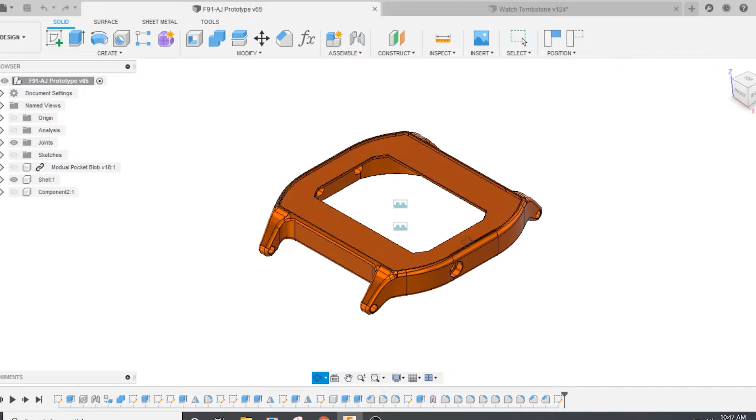This is what we're going to finish making today. I started this process in my last video where I got most of this underside geometry made. Now we're going to finish off the top here. We're going to do that on my custom tombstone. We're going to start by clearing away all of the excess material with an adaptive clearing and a Lakeshore Carbide 3-flute end mill.

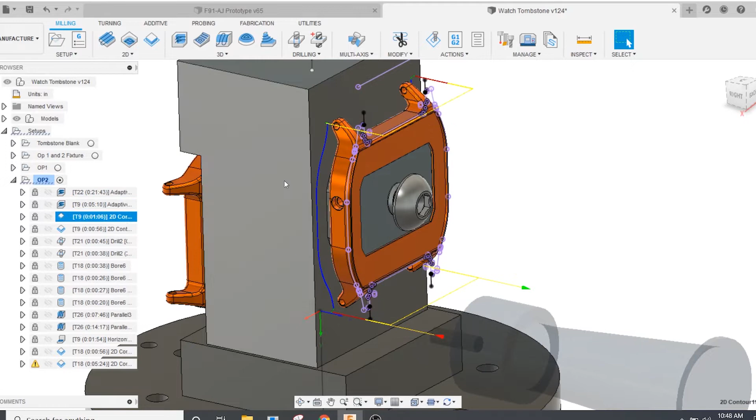3/16 3-flute. Then we're going to move down to a 1/8 inch 3-flute. This one's from OSG. And that's going to peck away all of the material the 3/16 is going to get into. We're going to do finishing passes on the left and the right sides here with that same OSG 3-flute. And then we're going to finish the spots here for the watch band again with the same tool.

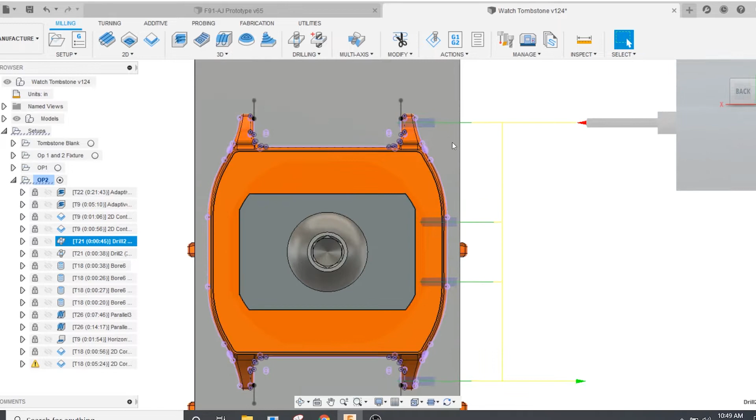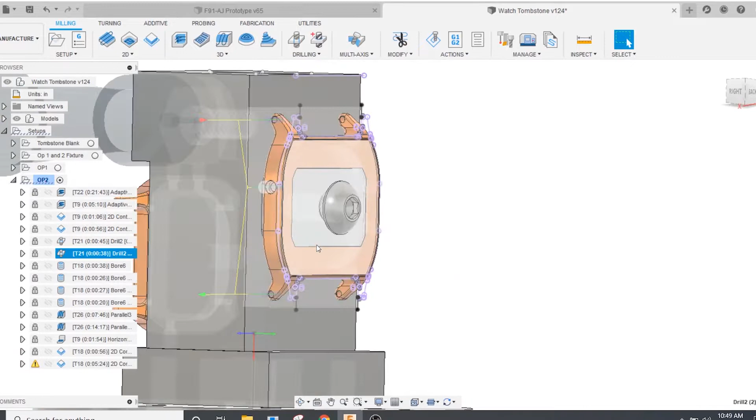Then we're going to go to a drilling operation with a drill that's about 50 thou. It's actually 1.25 millimeters. And it's going to drill the pockets for the spring bar. And it's going to give us a pilot hole on the pockets for the buttons. And then to the other side, again, spring bar holes, button holes.

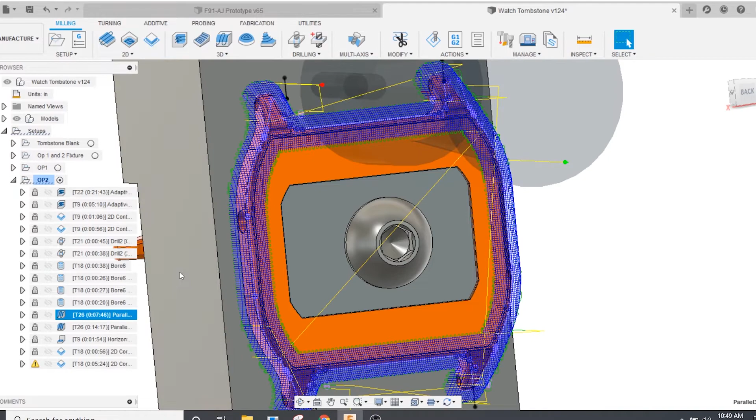And then we're going to go in with a 1/16 end mill and clean up all of the buttonholes. It's stepped here, so it's broken up in two different operations. It'll do the big step first and then the little step all the way around. Then we are going to do a finishing pass on these fillets with a 2-flute 1/8 inch ball mill. This one's from Harvey Tool.

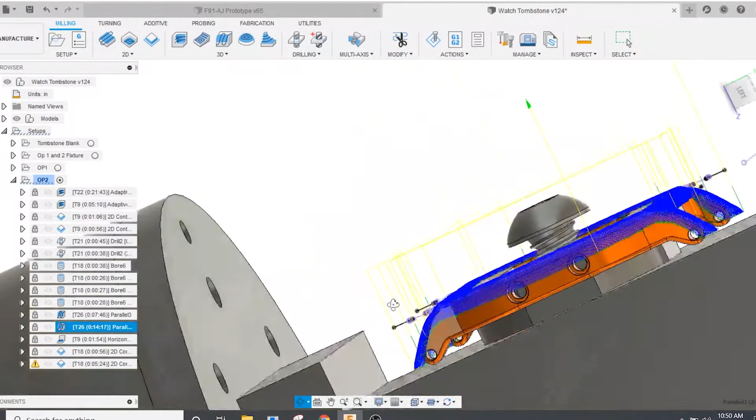Actually, we're going to do a semi-finishing and then a full finishing pass here. I found that got a more consistent finish. And that should get all of the curves all the way around. Then we are going to finish the face here, going back to the OSG 3-flute 1/8 inch end mill.

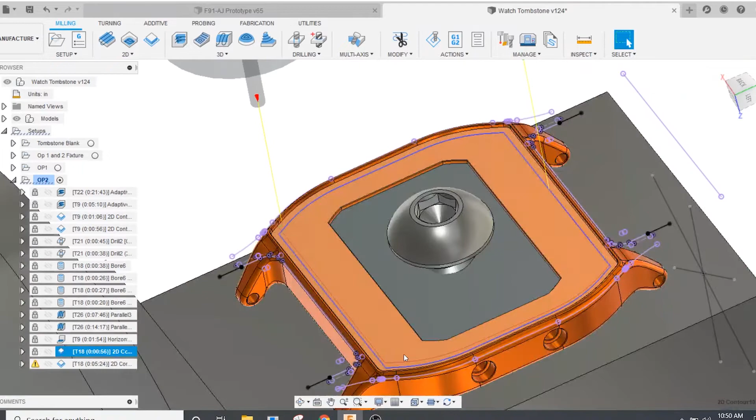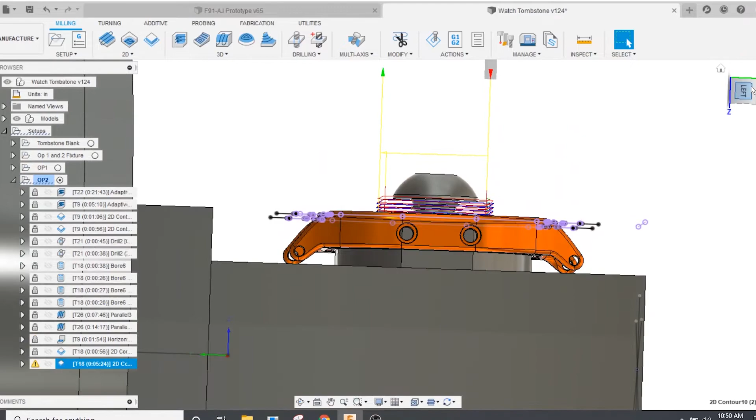And then we are going to do a finishing pass on the inside wall here, all the way around, and then it's going to eat its way through a little hat of material that we're going to have left and cut the watch out from the screw that is holding the whole workpiece in place, and also going to finish that wall. This is what I'm most worried about. I'm probably going to break that end mill. I've just accepted that, but I haven't found a better way of doing that yet.

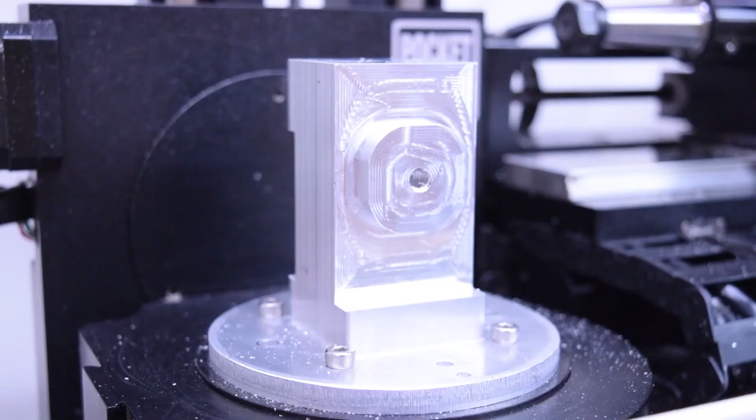This is what the workpiece from last time looks like. I've actually had to make this again. The first time I ran it, the one you saw in the video last time, I didn't have the 1/16 inch tool to do a finishing pass on the inside here. So this was oversized and wouldn't have fit on my custom fixture on the Pocket NC. So the other night, I just ran another one. Now that I have the code proved out, it's actually pretty hands-off and wasn't that difficult to run.

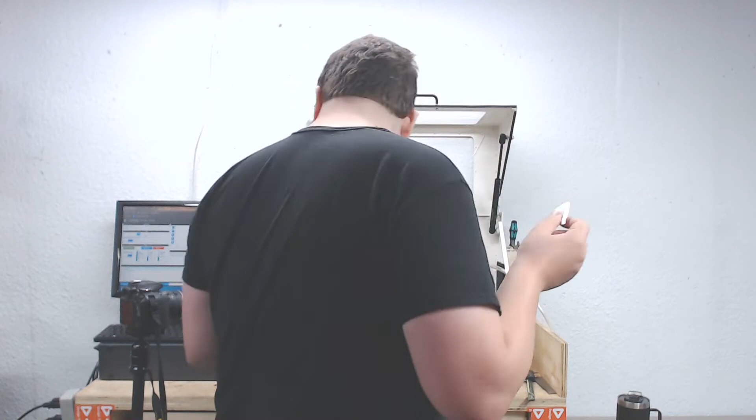And the finishes on this one are better because I got some better tools in from Lakeshore Carbide, and I was able to tweak my code and my speeds and feeds from what I learned last time. I've had a little bit of time to do some experimenting and measuring, and within what I have the ability to measure right now with my calipers, this inside pocket seems to be in spec. The problem is, even with it in spec, it does not fit on my custom fixture here. And that's okay. I intentionally left this a little bit oversized. But we need to fix that before we get started.

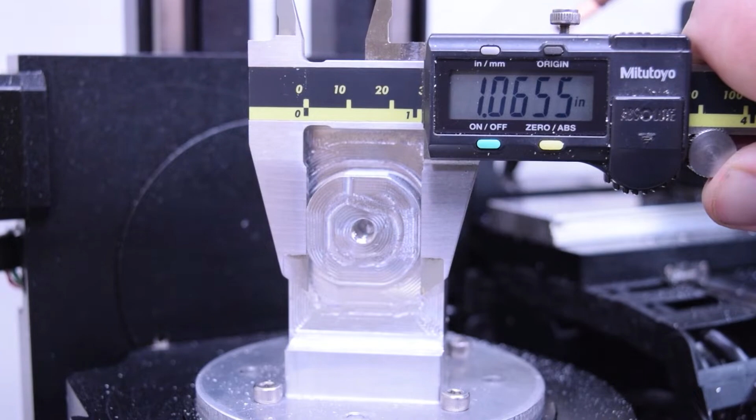So the first thing we need to do is run a couple more light passes on the fixture until it fits this. My fixture here is measuring 6 thou oversized. My actual part here is measuring dead on. So I need to take off at least 6 thou on my fixture to get it to fit here. First thing I'm going to do is put in my 3/16 end mill, and I'm going to run a spring pass of exactly what ran last time on here to see if that changes anything.

All right, everything's ready. This should be a very conservative tool path that takes off almost nothing, or maybe doesn't even touch the part. Okay, that definitely didn't touch the part. I'm going to take off some stock to leave in CAM and rerun it. So I found a mistake. I meant to give it 3 thou stock to leave. I gave it 30 thou stock to leave. So that was never going to touch the part. I'm going to put it back to 3 thou, not 30 thou, and try again.

Okay, that was a good, just very light spring pass. It should still not fit. It's still not fit. So let's walk it in by, I think we can do a thou this time. Still not quite there. I'm just going to keep repeating this until I get a good fit.

So that took a lot of passes, but I'm very happy with the fit. It is basically perfect. It goes on fairly smoothly. It might be a little bit difficult to get off, but I think we can manage that. There is zero wiggle whatsoever. It is beautiful.

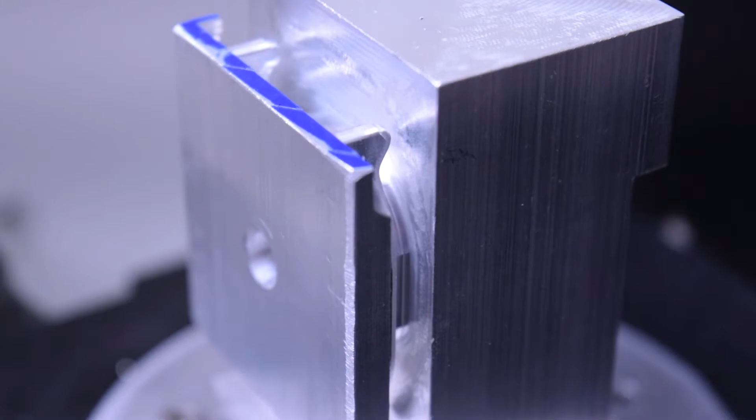All right, time to move on to the actual part. We're going to start with the same tool that I've been using to clear away most of the hat left on this part from the first op and start to rough out, actually do most of the roughing on the top.

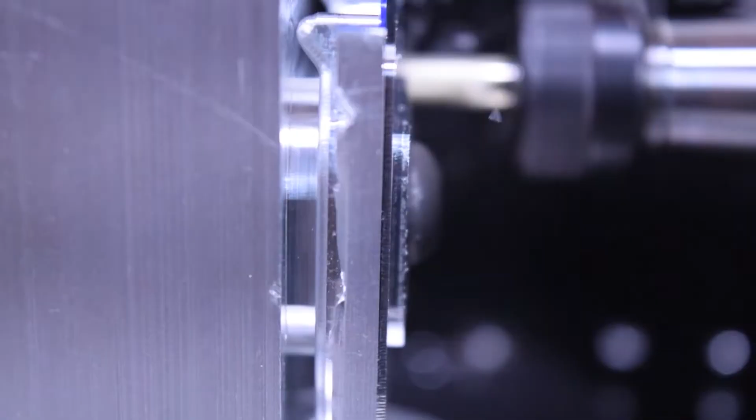This is really starting to look like a watch, and it's awesome. That's the most of the material removed. Next couple ops are basically just removing little bits of material, just chipping away at any extra stock that's left that we couldn't get to with the 3/16 end mill, and we're going to just start stepping down sizes.

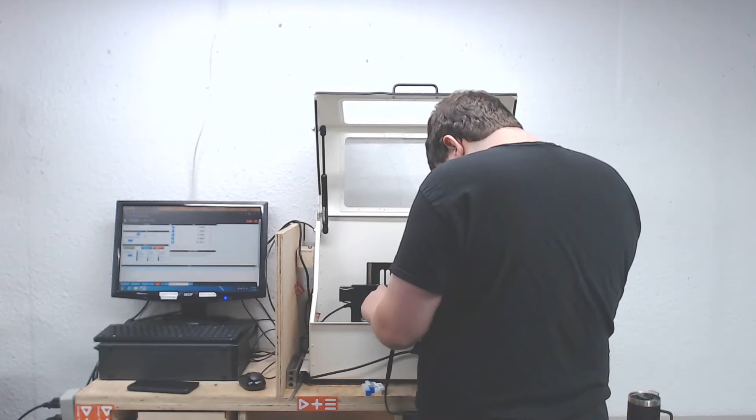I'm a little bit worried about, it's kind of hard to see, but there's some nubs here, and I'm kind of afraid that the ball nose end mills will not crash into those, but suddenly hit more load than they're expecting. That could cause finish issues. But there's a whole bunch of tools to run first, and maybe one of those will chip that away.

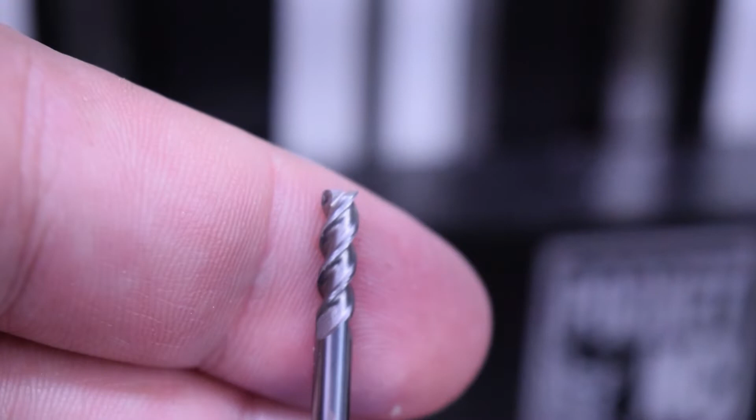So this is the next tool. This is a 1/8 inch OSG 3-flute high helix end mill. So far, I've been pretty happy with this one. I think I actually like the Lakeshore Carbide version of it better, but I'll use this one until I murder it. So that last toolpath did go pretty well with the 3/16 end mill.

There's two things I didn't tell you. I just slowed down my feeds and speeds a little bit. The other thing that I did is I got a little piece of flappy aluminum hanging off of the part as it was cutting, and I just cut that off with a pair of side cuts because I didn't want it flapping against my end mill and breaking something.

The 1/8 inch tool just finished, and I'm going to be honest, I was out of the room the whole time that was running. I thought I had longer. The roughing part of it seems to have gone fine, but the finish passes, particularly on the top and the bottom of the watches where the watch band goes, the finish is not good. The sides seem to be fine.

So I'm just going to rerun those 2D contours that are the finishing passes, probably just as a spring pass. I'm not going to take off any more material, and that'll hopefully clean up the sides a little bit. I'll have to do some testing on this and improve my speeds and feeds, because obviously what I had here didn't work. I'm probably running too fast, because that's what I always do. And this time I'll get that on video.

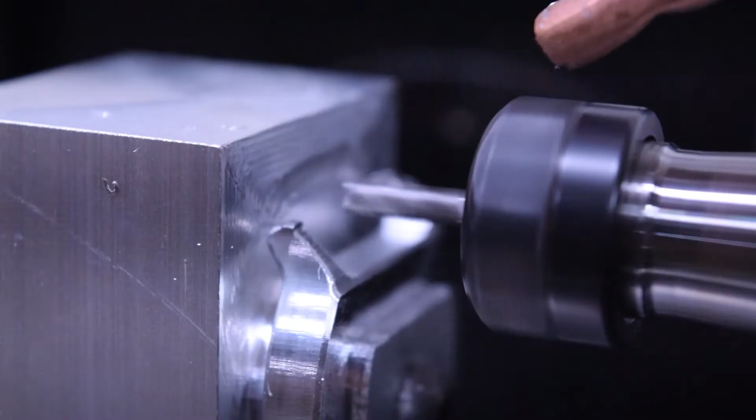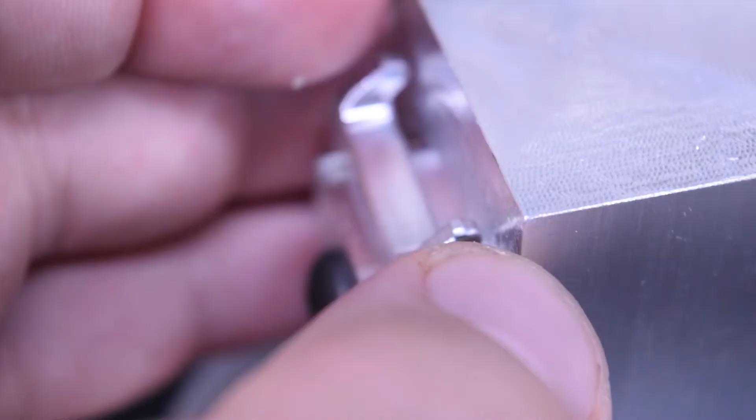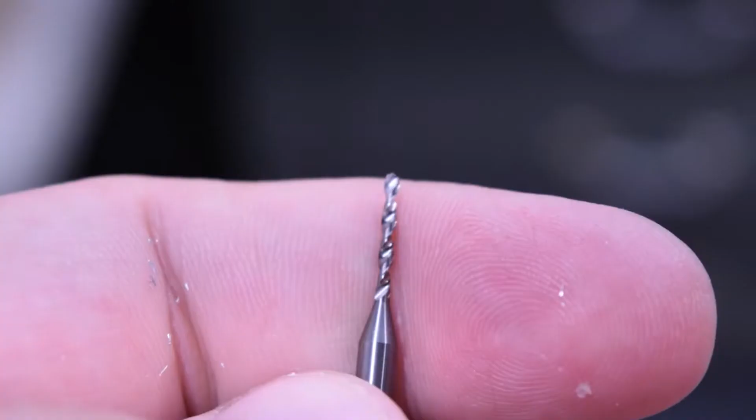That was definitely better. Finishes are improved. I think I'm just going to run it one more time because I think it will still help. Up next, we're going to do a whole lot of drilling with a little tiny drill bit. This is that 1¼ millimeter drill bit that does the roughing for the buttonholes and drills the holes to size for the spring bars.

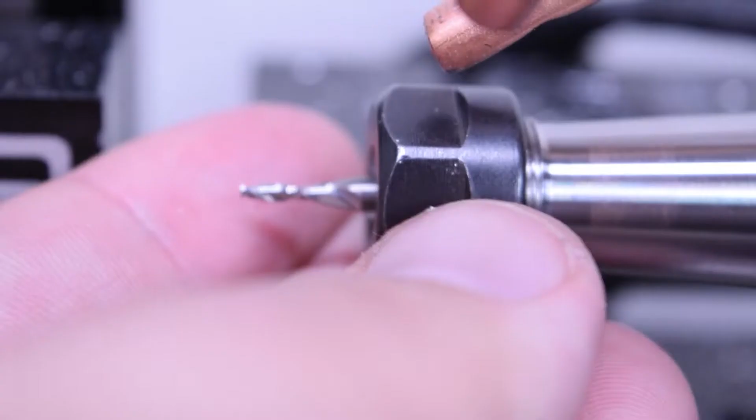Next up is a 1/16 inch Lakeshore Carbide 2 flute. This will be boring out the buttonholes. I almost just crashed everything. I didn't load the new program, so it was going to try to drill with the tool that I had just put in there. Let's try this again with no near disasters. Hopefully. Fingers crossed.

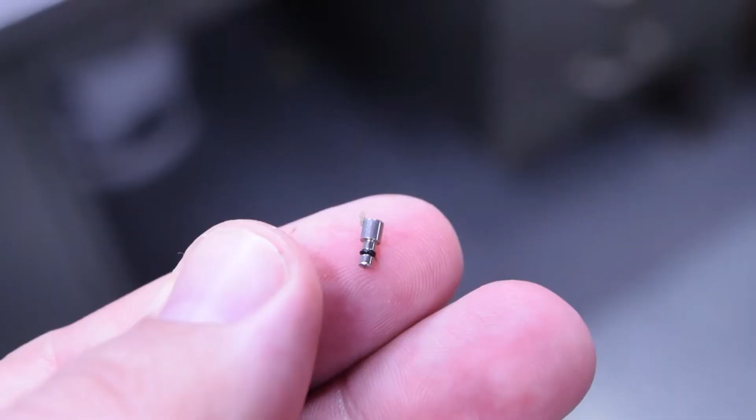I'm going to go get the button to do a test fit with it so I can dial in the diameters. This is my button from the existing Casio watch. I'm not going to be making these buttons myself right now. They do a very good job with these little buttons, and I do not have the skill to replicate them yet. Give me a little while. I could probably eventually get them done on the lathe.

So far in all of my prototypes, I have not had a button that has actually functioned. I'm hoping this one will be the first functioning prototype with a button. So first thing I'm going to do is test the fat part of the button in that bigger hole.

Okay, it seems like I've actually oversized it for the top of the button, the fat part of the button, which obviously I can't go back and fix now without doing a whole new watch. And now I'm going to try the other end of the button. I can't tell right now what the fit feels like for sure. I think it might actually be too loose as well. It's kind of springing back out, which makes me think it's because of the O-ring on here.

I'm just going to finish this part and see how it fits with the actual movement in there. Because right now I think it's hitting the fixture where it should be able to go farther in, or it will be able to go farther in once the fixture's not in the way. So basically my result is inconclusive. This didn't tell me anything. Well, it told me it was too big, not too small. Up next, we have the 1/8 inch 2 flute ball mill, and this is going to do a whole bunch of finishing.

I just had to stop that. That did not sound right. I think it was taking a deeper depth of cut than I intended for some reason. So I'm going to go back to CAM and break the semi-finishing up into 2 steps, which is going to take a while, but that's just the way it goes. Alright, so now it's going to take a total of 3 step downs. It's going to do 2 5/10 step downs, and then I think it's 2/10 step down for the final finishing pass.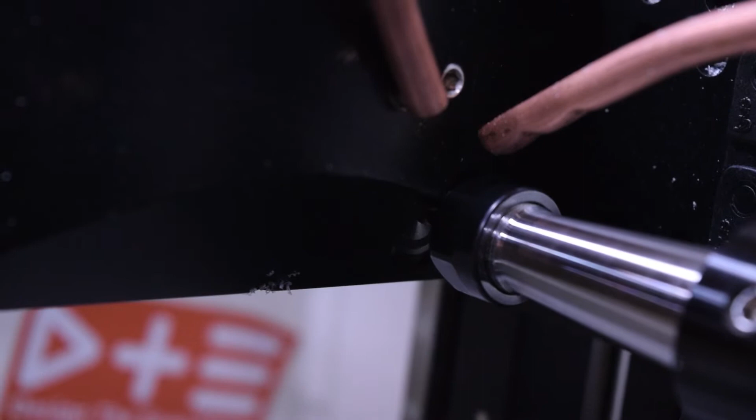Now that the ball mill is done, I'm going to go back to my 1/8 inch end mill, and we're going to clean up the face that's underneath the crystal, or whatever you want to call the plastic bit on top of the LCD screen.

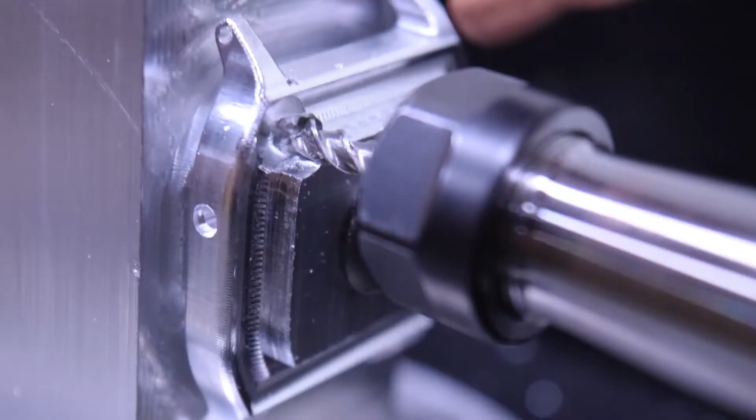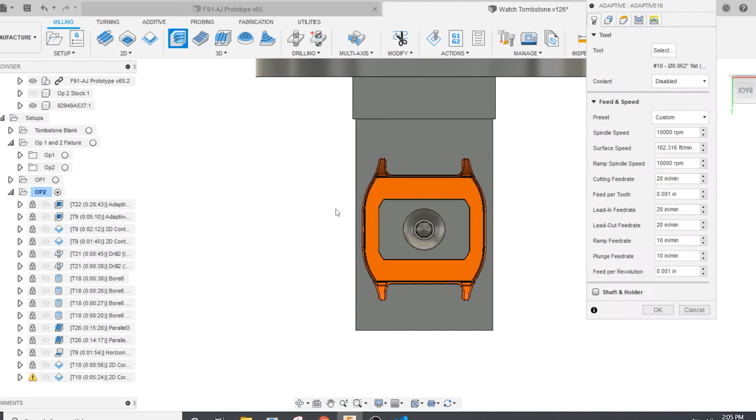So that wasn't right. It plunged through the little hat that's left. I think everything's still fine. I think I need to add a toolpath to clear away more of that hat before finishing. I think that's my problem. Tool's fine. All right, so let's do a 3D adaptive. We're going to limit it by that and that. We want it to be inside that boundary. Yeah.

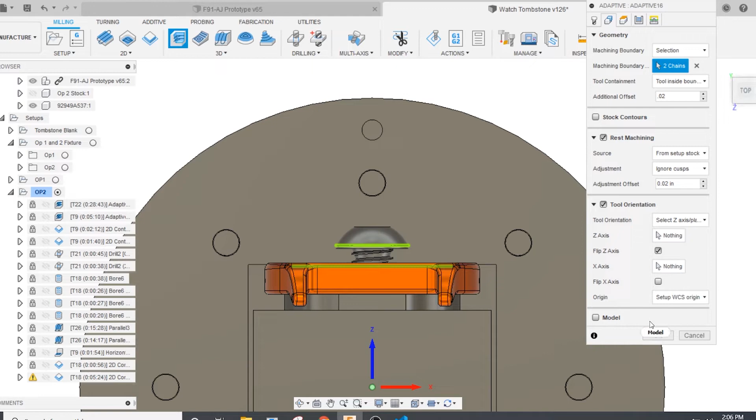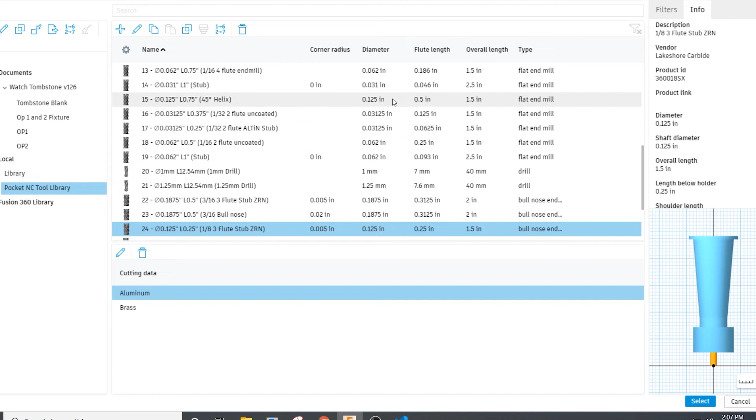Let's give it a little safety margin from our screw too. 20 thou. Oops. Select our right tool here, which is not that one. Nope, that's Harvey. Here, let's sort. There we go, Lakeshore. Select that one. And actually, I changed my mind on my, there we go. So now I'm gonna have it constrained by that and by that. And then we'll give it a slightly larger offset, 0.05.

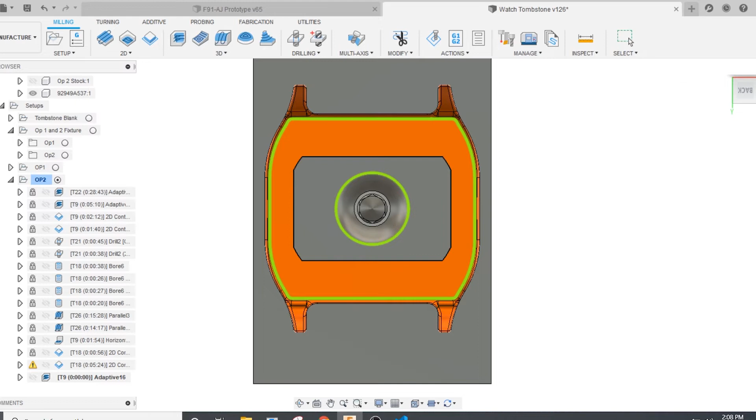Maximum roughing step down. I want to be really gentle on this one. Maybe 20 thou step down. Again, trying to be gentle here. Stock to leave, smoothing, feed optimization, that's fine. Let's see what that looks like. Now, one more thing before it generates. We have to make sure rest machining is on. Rest machining from previous operations. Okay, and let's move this to the right spot, which is right there. We'll unprotect that, protect, and regenerate these two.

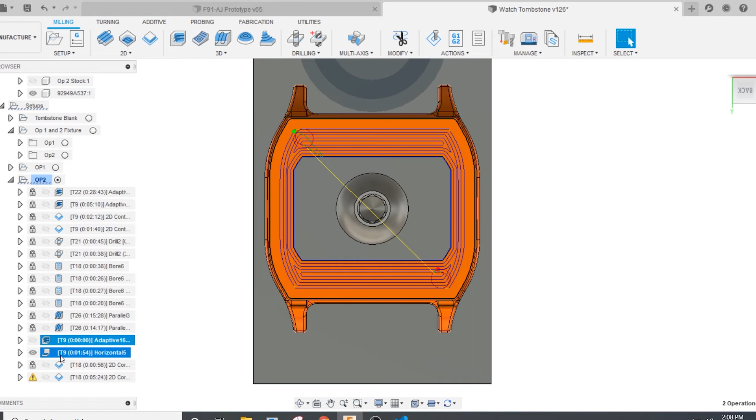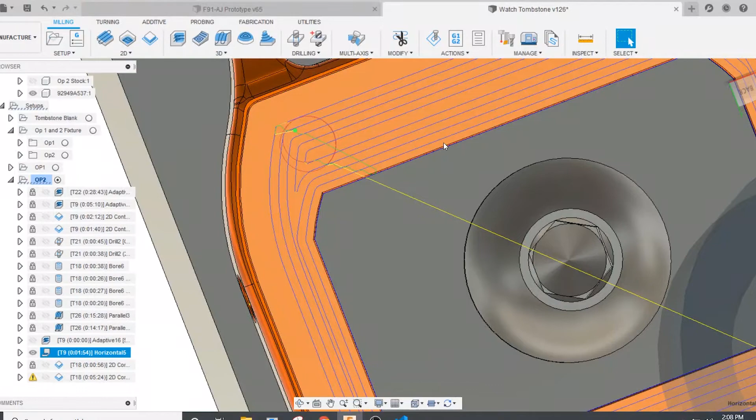So you can see that spiral in right there on the horizontal. That's where it hit material last time that I wasn't expecting to be there, wasn't thinking about. And it would have kept hitting that tall piece of material as it went along this section. All right, our adaptive's thinking. Okay, it's staying plenty far away from the screw there, and it should take out most of that material. So once this is done, I'll go ahead and run it, and then we'll run the horizontal.

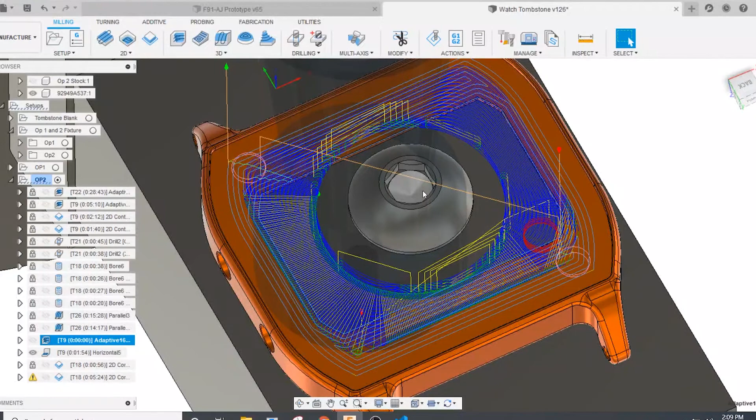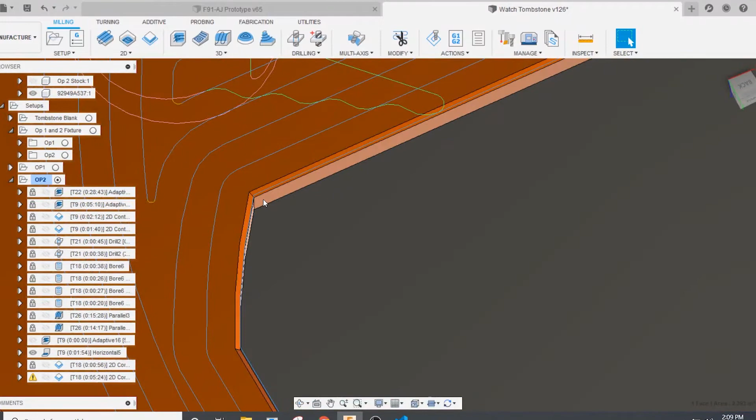I was trying to keep as much of this hat here around as possible, because that is where all of our clamping force is coming from this screw. And so it'll be more rigid the more material we have here. Because this wall is only like 10 thou thick or something like that. So not a lot of rigidity there. But I think this is where we need to cut all the way through. That's a lot of toolpath.

I just rehomed everything just in case we lost any steps in that rough toolpath. Now I'm going to retouch off the tool, again, just to make sure that if the tool slipped or whatever, that's not going to cause problems now.

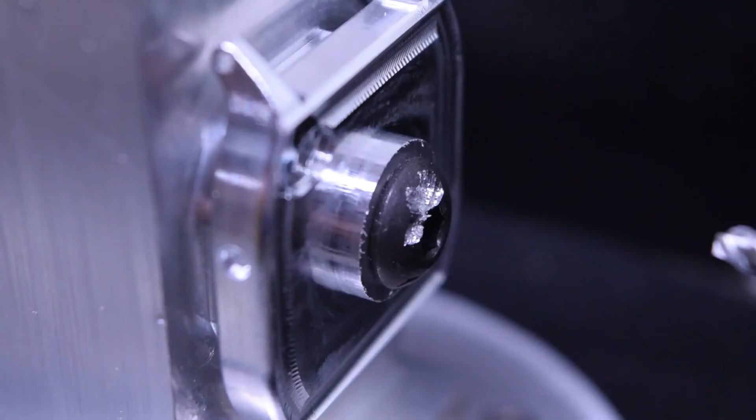I have no idea why, but my end mill decided it wanted to eat the screw. Definitely destroyed that end mill. Let's see if we can find why in CAM. Oh, yep, right there. You see that? Travel moves going right through the part. Ooh, that's frustrating. Now it's just because I was in a hurry, though.

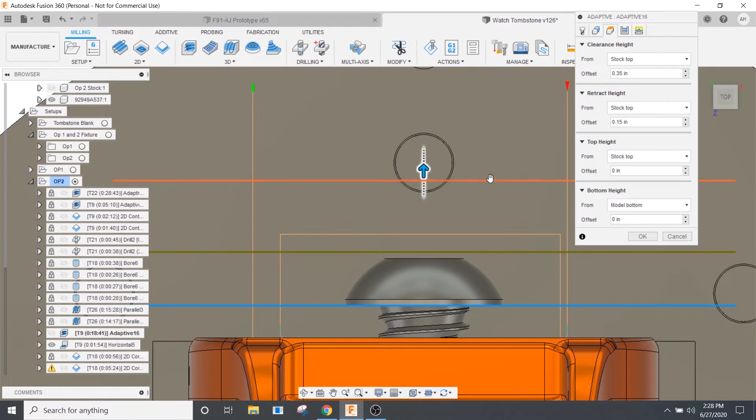Let's move those up above the screw. Make sure those are above the screw. That's what I get for being in a hurry and doing this. I didn't check the retract planes in Fusion to make sure that it wasn't going to hit the screw.

Now, I don't have an exact replacement for that tool, but I do have the Lakeshore Carbide version of it that is coated and a little bit stubbier. And I actually like these ones better. It's also the variable, not variable helix, but variable flute, I believe, which may help me get better finishes. As long as I don't machine a screw.

I forgot to home it before I touched off the tool, and the tool hit the body because it wasn't lined up with the probe. I don't think it did damage to anything.

Well, that finally finished. The adaptive with the new tool actually went much better than the old tool. Again, I like these Lakeshore tools better than the OSG tools. Maybe they just suit my machine better. Maybe I just have better speeds and feeds for them. But they work better. The adaptive left really good finishes.

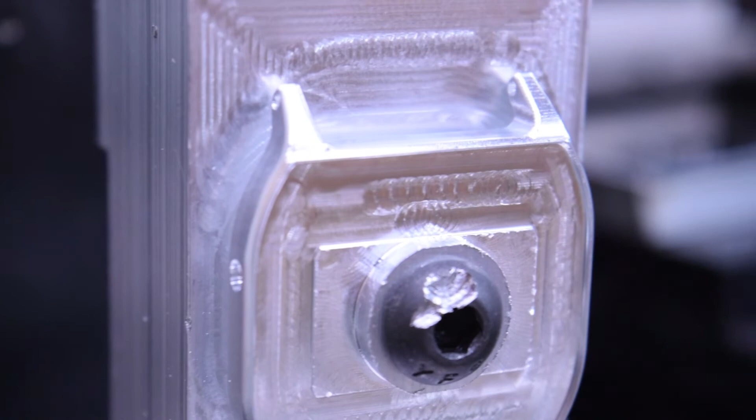My horizontal finishing path actually did not leave as good of finishes, though. I think because it was just plowing through material instead of adapting it out. So that may be something I have to change in future versions, but this is a prototype. You know what? I want my prototype to be better than this. I'm just going to rerun that horizontal.

Well, it helped a little bit, not a huge amount. I'm just going to move on. We'll fix that next time. Again, this is prototype, not production. I'll just hand finish it. I did want it to be better, though. So next step is doing some cleanup and actually cutting out the middle of where the screen goes with the 1/16 inch end mill.

And there goes an end mill. The feeds and speeds for that slot were not right. It may have been ramping down too fast. I don't know. Obviously they weren't right though because it broke the end mill. I'm going to go back to CAM and I'm going to slow the toolpath down. And as it's ramping in, I'm going to make the angle of each ramp more gentle so that it slowly feeds in. Still doesn't sound right.

Well, that didn't go as smoothly as I wanted. I had to turn the feed rate down a bunch manually with the feed override on the computer. But theoretically, the watch is done. I'm not entirely sure that it cut all the way through, though. I'm going to run another pass and tell it to go below the material thickness. It'll cut into my fixture a little bit, but should make sure the watch is all the way loose.

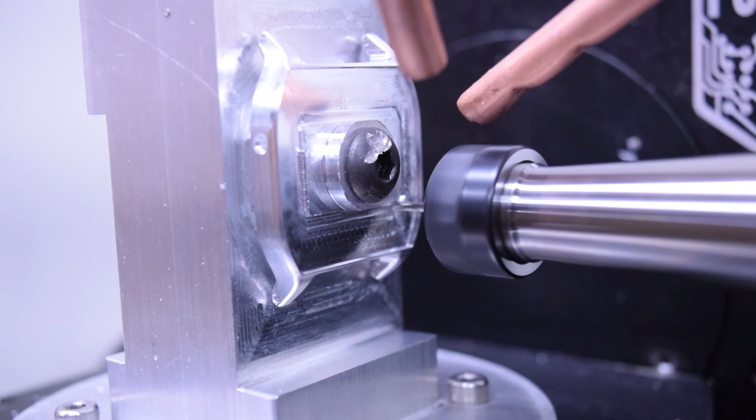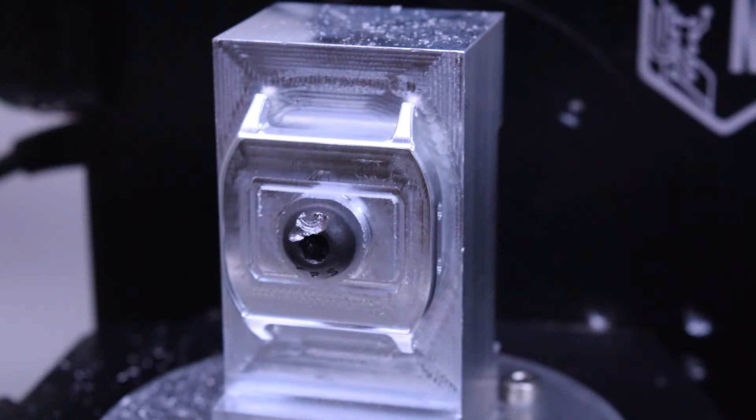All right, let's see if we can get this off of here. I'm still not entirely convinced it cut all the way through, but it's hard to tell. Oh, it's free. Okay, so I'm going to take out the screw. Not with that Allen wrench, I'm not. Oh yeah, look at that. Pops right out.

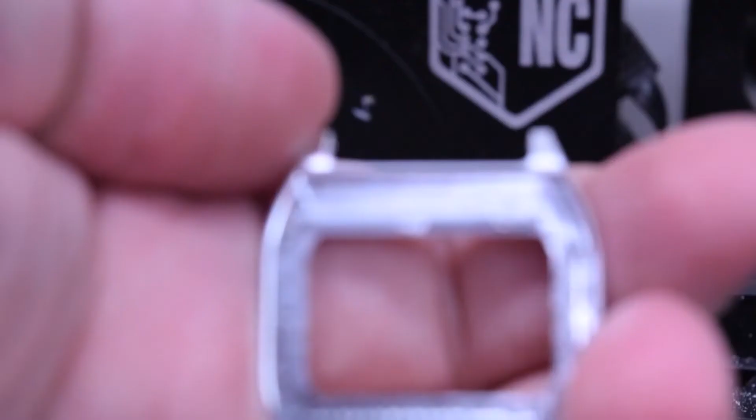And there's my part. That is exciting. It's not perfect, but it's exciting. It's super light. I cannot wait to wear this.

Well, I think that's all I'm going to do today. As soon as I turn this off, I'm going to go try to fit the watch in. But I'll do a video later on finishing this, like actually putting a final finish onto it. I may try to anodize it, which I probably won't do on video because I've only anodized like once, and you don't want to watch me do it because I would just mislead you. But I'm super happy with this. I'm really excited to wear this for a couple days.